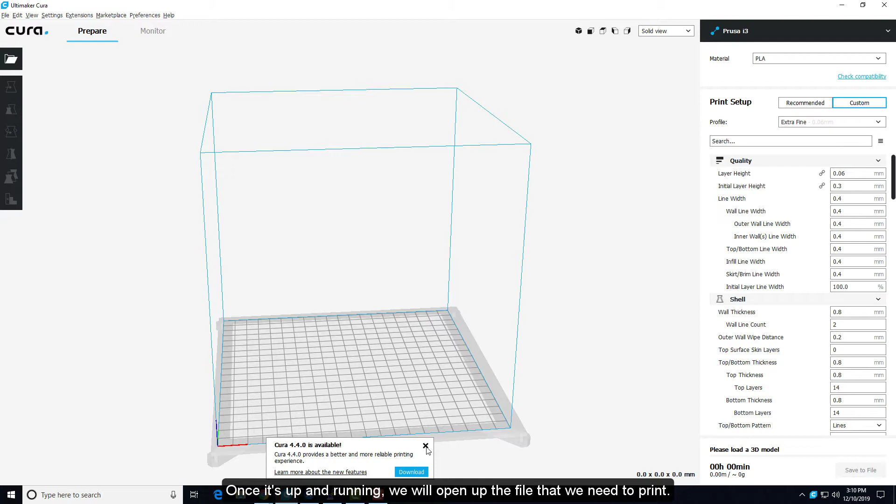Once it's up and running, we will open up the file that we need to print. Now, in order for us to be able to change the settings of our print job, we have to make sure that our file is in STL format. Now, Cura shows us exactly what our part will look like on our printer bed.

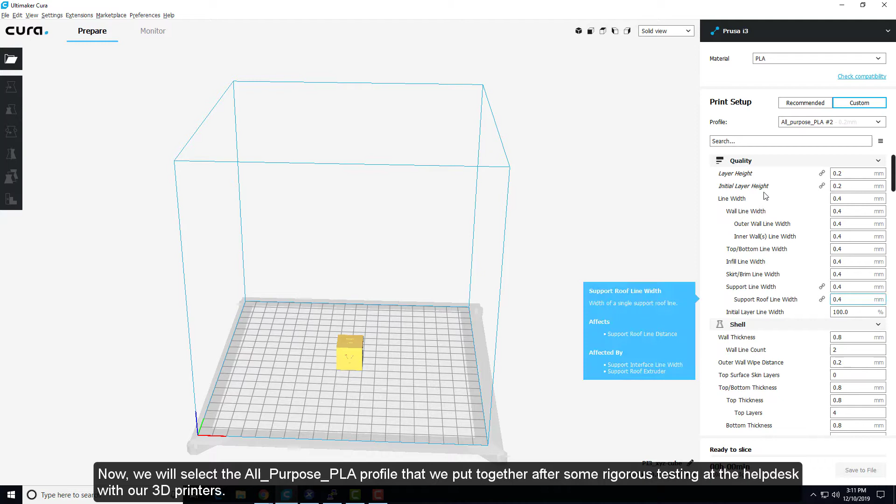Now we will select the all-purpose PLA profile that we put together after some rigorous testing at the help desk with our 3D printers. We can make changes to this profile depending on what we're printing. A part that will be supporting weight will have a higher infill density, while a part that will not be supporting any weight will have an infill density of 10 to 15%.

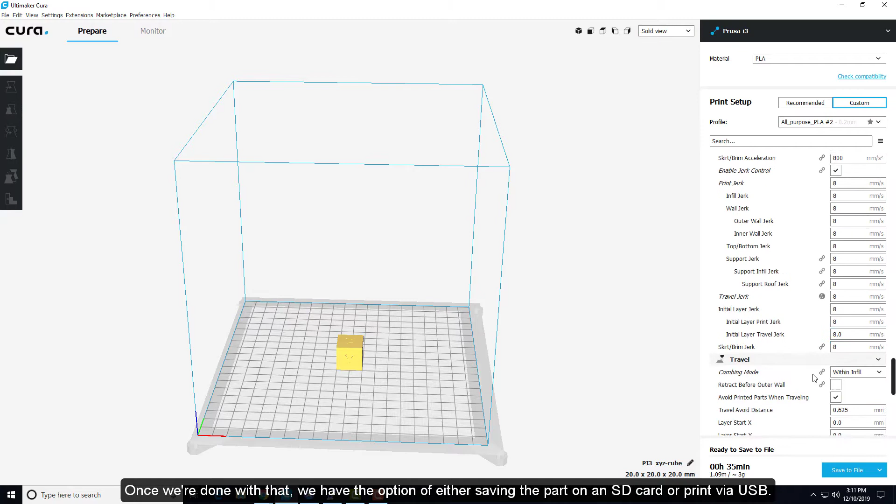Once we're done with that, we have the option of either saving the part on an SD card or printing via USB if the printer is connected to the computer. If we choose to print via USB, Cura will start heating up the extruder and bed, and once the target temperatures are reached, the printer will automatically start printing.

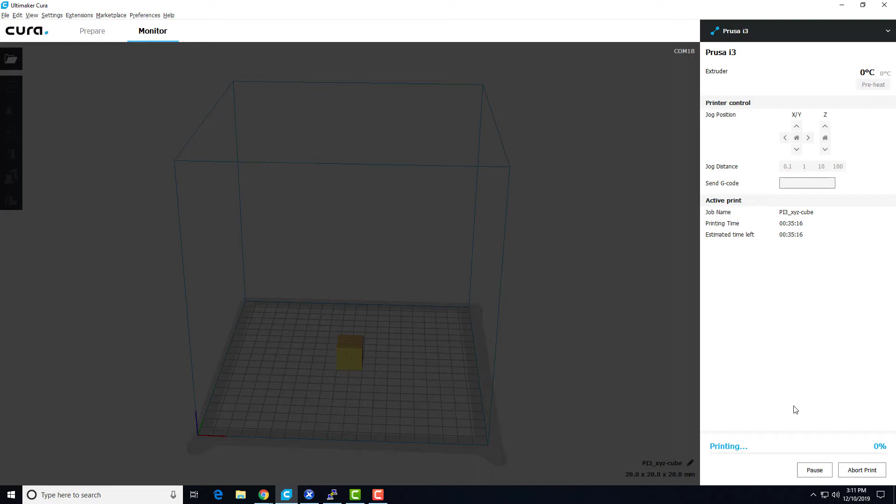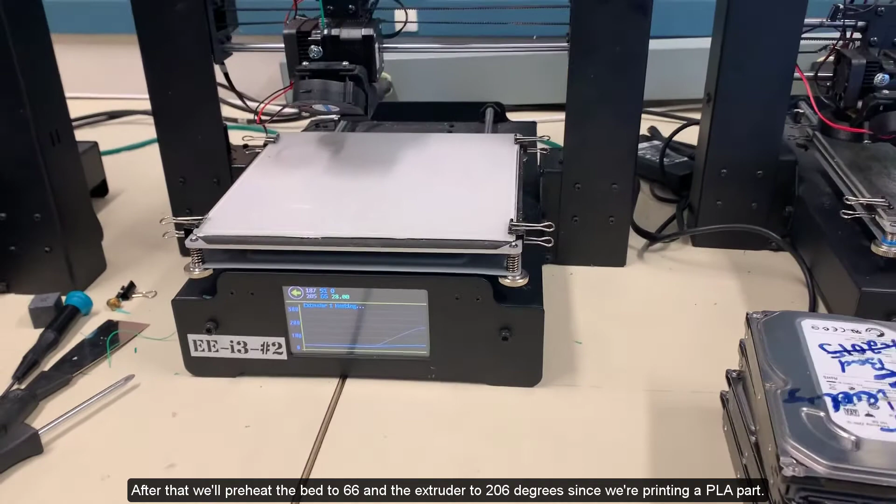If we choose to save our file on an SD card, we'll insert the card into the printer first. After that, we'll preheat the bed to 66 and the extruder to 206 degrees since we're printing a PLA part. To ensure adhesion between the bed and the part, we use hairspray, which does an absolutely amazing job.

Now we'll wait for these to reach the target temperatures. We really don't want to spray too much, and we also have to spread around the hairspray with a napkin.

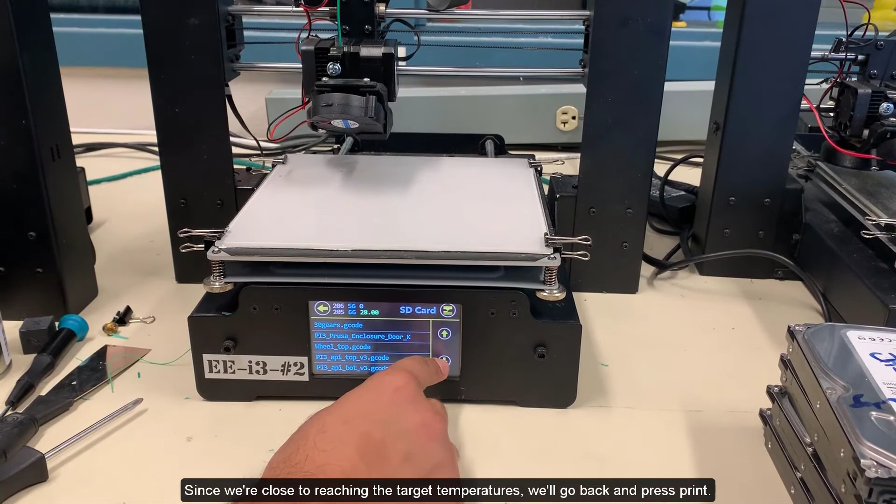Since we're close to reaching the target temperatures, we'll go back and press print. Upon this, we'll see a list of parts that are on the SD card, and we'll pick the part that we just saved onto the card. We also have to get rid of any oozing filament before the print has started.

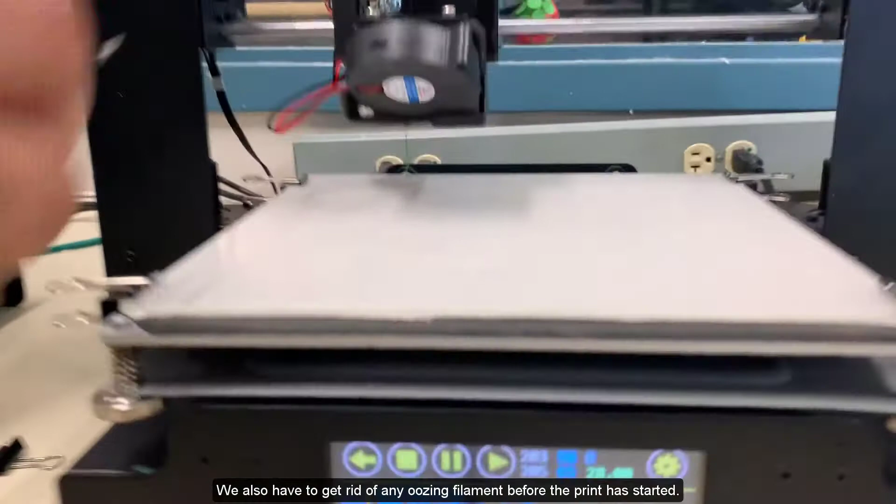Now that the target temperatures are reached, the print job will commence. We have to ensure that the filament is extruding. Since the filament is not extruding, we have to lower the bed.

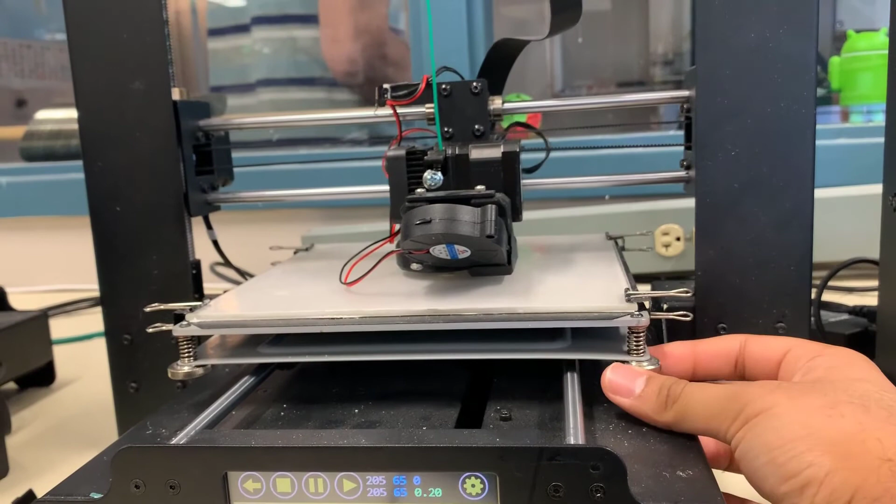Now we'll just wait for the part to print out.